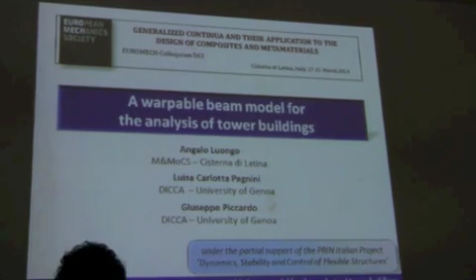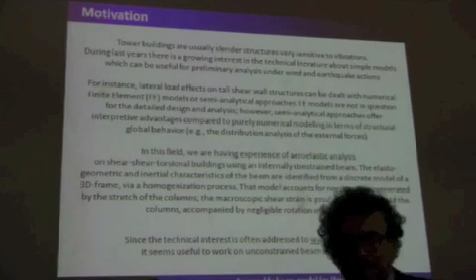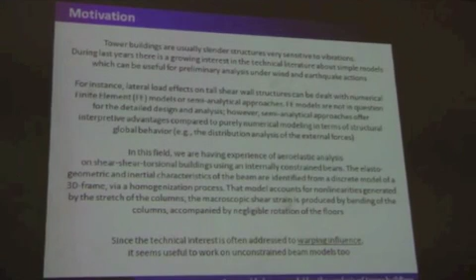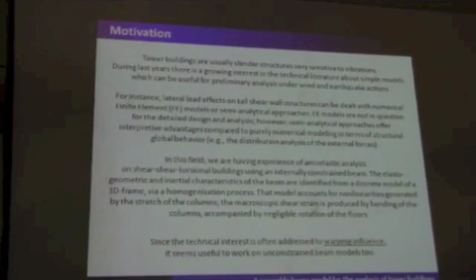Tower buildings are usually slender structures very sensitive to vibrations. During last years, there is a growing interest in the technical literature about simple models which can be useful for preliminary analysis under wind and earthquake actions. For instance, lateral load effects on tall shear wall structures can be dealt with numerical finite element models or semi-analytical approaches.

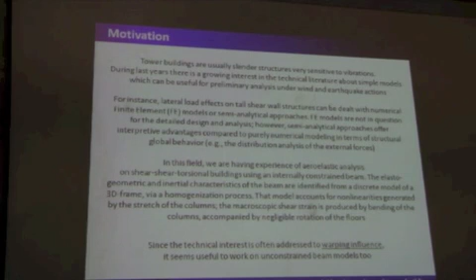Finite element models are not in question for the detailed design, but semi-analytical approaches can be often very useful in terms of structural global behavior and from an interpretive point of view of the global behavior of a structure. In this field, we also have experience about aeroelastic analysis of shear-shear-torsional buildings using an internally constrained beam.

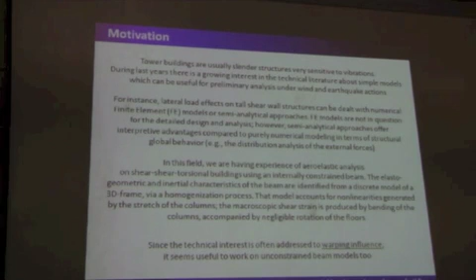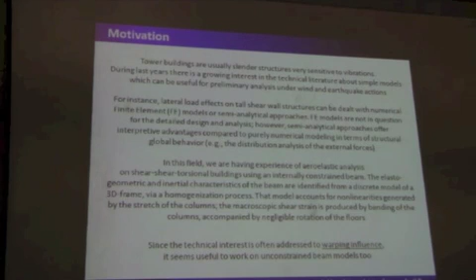But since the technical interest is often addressed to warping influence, it seems useful to work also on unconstrained beam models. Then this presentation, starting from a fine three-dimensional model, aims to formulate a coarse one-dimensional warpable linear model able to simulate the bending torsion of the building floors with the addition of suitable distortional variables.

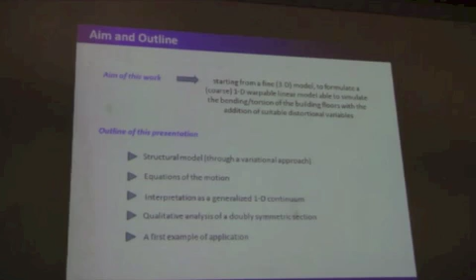The outline of the presentation is: starting from a structural model of kinematic descriptor, through a variational approach to derive the equation of the motion, the interpretation of this equation as a generalized one-dimensional continuum, the qualitative analysis for a particular kind of cross-section, and finally a first example of application.

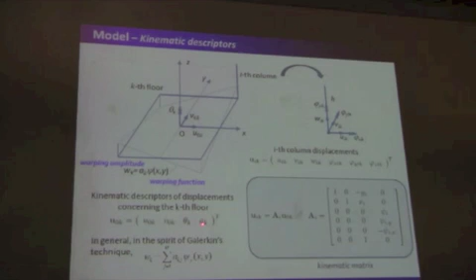The kinematics is quite simple. In the figure, a generic floor is described by four parameters: two translations, a twist, and A_k, which represents in general a warping amplitude, different for different floors, and the warping function is assumed the same for all the floors of the building.

In general, it is possible, in the spirit of Galerkin's technique, to use a number M of warping functions. I'm sorry, the resolution is not very good. And it is possible through a simple kinematic matrix to have a relationship between the displacement of the generic floor and the displacement of generic columns on the floor.

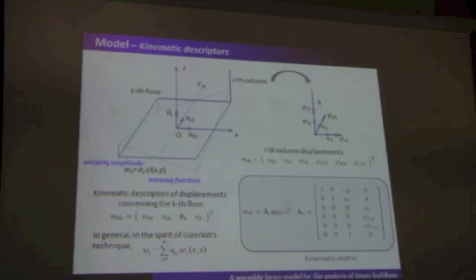Then it is possible to derive the elastic potential energy from the generic column, and using a simple continuization rule, it is possible to describe the elastic potential energy for the column as a function of five parameters: the first derivative of the displacements U0, V0, and theta, the warping amplitude A, and the first derivative of warping amplitude A prime.

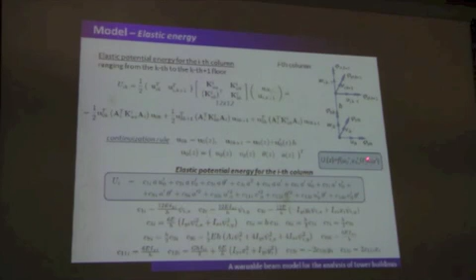It's possible also to give a description of the elastic potential energy of the generic floor, for example, using a model of shear deformable plate, and using the continuization rule it is possible to write it as a function of A(z). A(z) is the amplitude of the warping.

Then, with a summation over the number of columns present in the building, and a summation with the elastic potential energy of the generic floor, it is possible to describe the energy density of the equivalent beam and the elastic potential energy of the equivalent beam. The kinetic energy has a simple description, and if the beam axes are centroidal and the displacement field is continuized as done before, it's possible to describe the kinetic energy of the equivalent beam.

The work of external forces has a simple description, since we assume that the forcing acts directly on the longitudinal beam axis. Using the extended Hamilton principle, it is possible to arrive at the 4 equations of motion in the variables u0, the displacement in x direction of the floor, v0 in the y direction, the twist theta, and the amplitude of the warping A. M is the mass of the beam, I is the inertial mass moment, and I psi is the warping inertia.

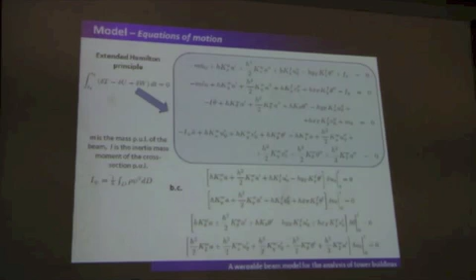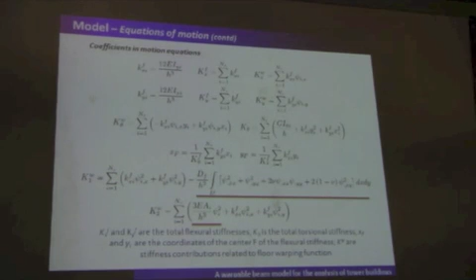It's interesting to give some comments about the coefficients in the motion equation. In particular, the coefficients Kx F and Ky F are the total flexural stiffness of the beam. K theta is the total torsional stiffness. X, Y F are the coordinates of the center of the flexural stiffness. And the stiffness with the apex W represents a contribution of the warping function. The contribution may be linear through the derivative of the warping function or quadratic.

In particular, it is possible to note that the K1 coefficient has a contribution of the energy of the plate, and this coefficient may be positive or also negative if the contribution of the plate is particularly strong. And in the second coefficient K2, there is a contribution of extension of the columns.

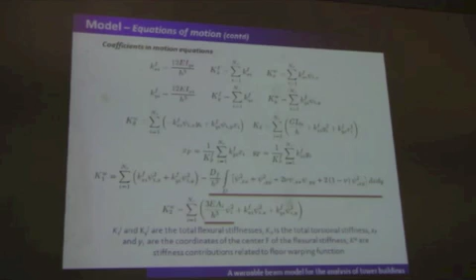I think maybe of some interest is the interpretation of the model as a generalized one-dimensional continuum. In particular, it is possible if the displacements are the three displacements described before, and considering A a distortional variable, exactly in the meaning that Professor Luongo has explained this morning, and the main reference is the recent book, Mathematical Models of Beams and Cables.

The strains are linearized, and also the generalized strains appear: alpha is equal to A and beta is equal to A prime. Using the virtual power principle, the equality of internal and external powers, satisfied for any kinematically admissible virtual motion, it is possible to obtain the balance equations. In particular, it's interesting to note that two internal actions appear, D and B, which can be called distortional stresses, dual of distortional strain rates and their spatial gradients. Q small can be referred to as the distortional force, that is the Lagrangian external force associated with the non-rigid motion of the cross-section.

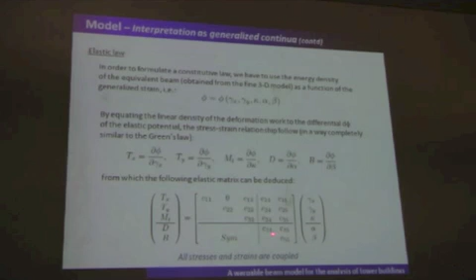And in order to formulate a constitutive law, we have to use the energy density function of the equivalent beam obtained before from the fine three-dimensional model as a function of generalized strains. Then, by equating the linear density of the deformation work to the differential of the elastic potential, it is possible to obtain a very simple relationship using a law similar to Green's law, from which it is possible to obtain the elastic matrix, where all stresses and strains are coupled.

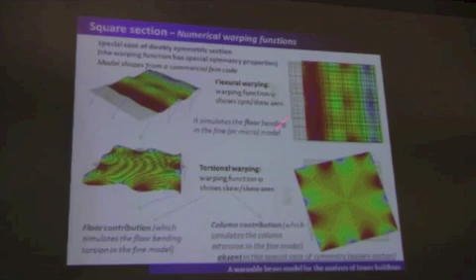To try to give some qualitative explanation, we deal with the special case of a double symmetric section. In this case, the warping function also has special symmetry properties. In the figure you have the representation of modal shapes from a commercial finite element code of a simple building with only one floor. In this case, you can distinguish between two different behaviors. A flexural warping, where the warping function psi shows a symmetric and a skew-symmetric axis and simulates the floor bending in the fine model.

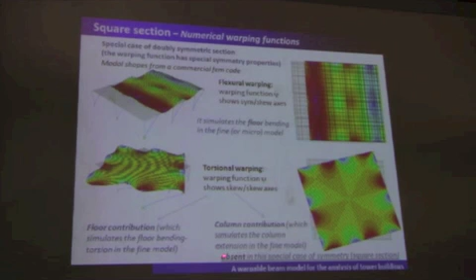And the torsional warping, distinguishing two different contributions. In both, the warping function shows skew-symmetric axes, and the floor contribution simulates the floor bending torsion in the fine model, and the column contribution simulates the column extension in the fine model. This is a classical contribution similar to the Vlasov model, and in our particular case, considering the following square section, this contribution is absent due to the spatial symmetry of the section chosen.

As a particular remark, in this case the floor contribution to the torsional warping function finds a warping different from that described by the classical Vlasov theory, where the warping causes tangential stress just because of its variation along the axis and non-uniform torsion.

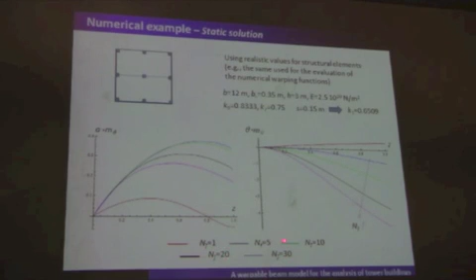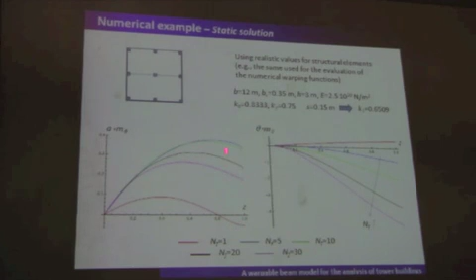Some numerical examples. The first case presented is exactly the case of the numerical simulation through the commercial code. These are the dimensions used. In this case, the three parameters K0, K1, and K2 are all positive. And the situation is when the number of floors is increasing, one is a trivial case, 5, 10, until 30 floors, it is possible to see that the twist at the top of the building is increasing. That is the shape of the warping amplitude, and the shape is this characteristic shape, and the maximum is reached not exactly at the top, but close to the top.

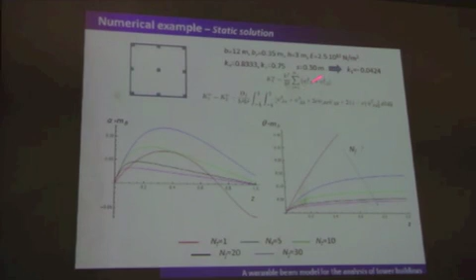When I try to change the thickness of the plate, is it possible to find a particular case when the K1 parameter is almost zero? In this case, the situation is a bit strange, because the twist tends to zero, and when the number of floors is increasing, also the twist at the top tends to become small. And also the shape of the warping is changing because the value of the parameters tends to become zero at the top of the building.

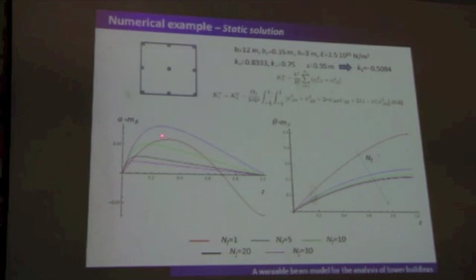And finally, using a relatively thick floor, it is possible to find a different sign for the coefficients of the ratio of the stiffness. In this case, the twist tends to increase relative to the first case, but in any case, when the number of floors is increasing, the twist at the top becomes small, while the shape of the warping amplitude is similar to the previous case.

As conclusion, we are presenting a first step of linear analysis about a monodimensional generalized model of a macrostructure, useful for qualitative or preliminary analysis of micro three-dimensional models. Preliminary qualitative analyses, in particular cases of symmetry, are shown. The corresponding static solutions are presented.

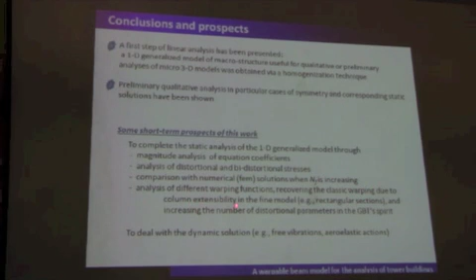Some short-term prospects of this work are to complete the static analysis of the monodimensional generalized model through a complete magnitude analysis of equation coefficients for different cases of the ratio of stiffness, analysis of the distortional stresses, and a complete comparison with numerical solution also when the number of floors is increasing, and analysis of different warping functions, recovering also the classic warping due to column extensibility in the fine model, for example using a rectangular section, and increasing the number of distortional parameters in the spirit of generalized beam theory.

And after the static analysis, to deal with a dynamic solution, for example, the free vibration and aeroelastic actions which can act on the building.

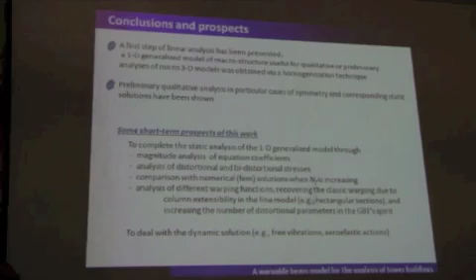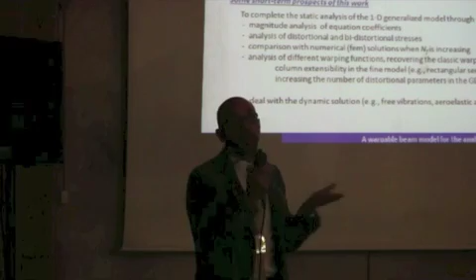When you increase the size of the buildings, did you move from shear to bending beams? If the behavior of a building is more shear, yes, I think yes. At the moment I don't study exactly the global behavior, but I think our beam is mainly a deformability like a three-dimensional shear type, but we also add the deformation of the floor. So it is a three-dimensional shear type with a bending of the floor. But another interesting point is to study also an effect like Vlasov warping, which is absent because our first example was too simple to add this.

Would it be possible to consider the columns that also go in terms of supporting? You consider columns for the floor, and what would change if, instead of considering columns, you consider walls? Walls. I think the formulation is not too different. It's a possible generalization. Yeah. I think it's very interesting because also from a technical point of view, the warping of the walls may influence very much the general behavior. Yes.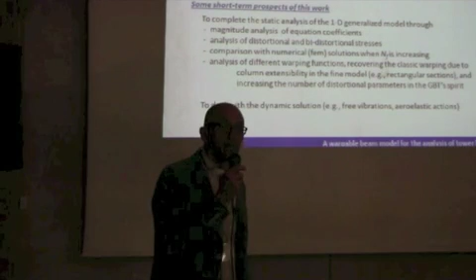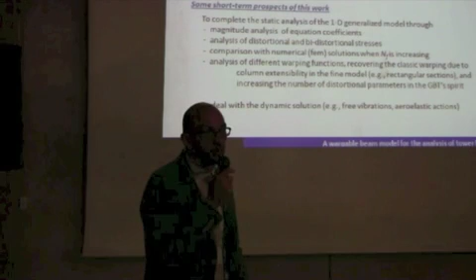Question here? I've seen that you can consider also the extensibility of columns. And I wonder if in this case you have to consider also the bending of the homogenized beam. I mean, if you allow the columns to be extensible, you could have also flexure, I think. Probably yes. I think our model mainly is able to catch the shear behavior, but probably it's possible to have also a bending effect. Okay.